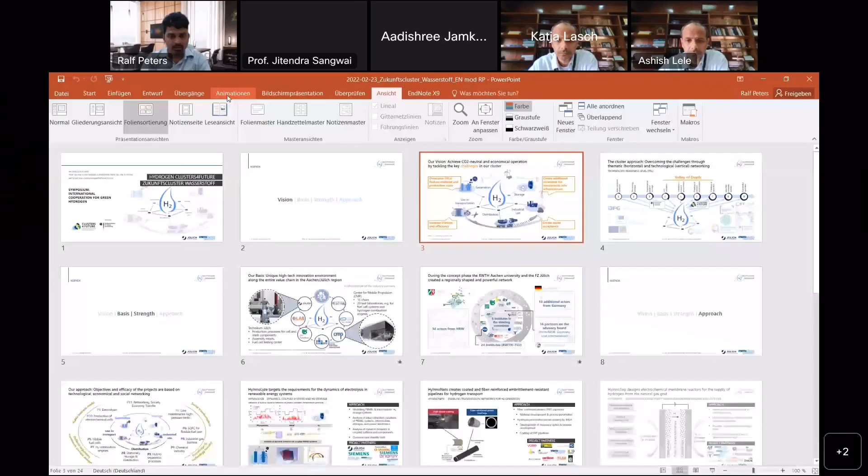So today I'm here in this panel discussion with another function I have. I am also in the steering committee of a joint cooperation between the University of Aachen and the Research Center Jülich - the hydrogen cluster. We gained this project in an initiative called Clusters for Future, where we look at several future technologies in Germany, from information science to biotechnology, and also hydrogen.

So what's this cluster about? I'll explain it very shortly and give you a brief overview of the project. What's the vision? We would like to have a CO2 neutral and economical operation, and we have to tackle key challenges in this cluster.

We have to overcome low TRLs, low technical readiness levels. We have to reduce material and production costs - that's from the technology of electrolysis, hydrogen production. We also have to do that in several countries, not only Germany, but also India. We have to increase the lifetime and efficiency, to generate and also for transportation. We have to create additional incentives to overcome the hurdles of high investment into infrastructure, and we have to create social acceptance.

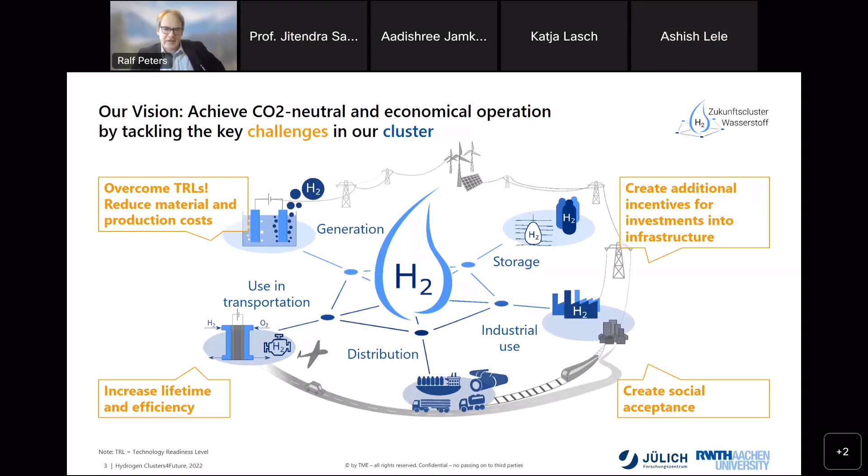One main thing is, if we look at these TRL levels I mentioned before - at 2 or 3, we are in basic research. And if we are at 8 and 9, we are really near market introduction, so we make a technical development. But we have here what we call a 'valley of death' at intermediate technical readiness levels, and with this cluster we would like to overcome this.

So what is the basis and what is the strength? We have several equipment in Aachen and also in Jülich. There's a Center for Mobile Propulsion with a lot of chairs at the university. They take care about fuel cell systems and also hydrogen combustion systems.

In Jülich we have a strong material side - Olivier Guillon explained that just before. We also have in our institute production processes for cell and stack components, assembly robots, and a fuel cell testing center.

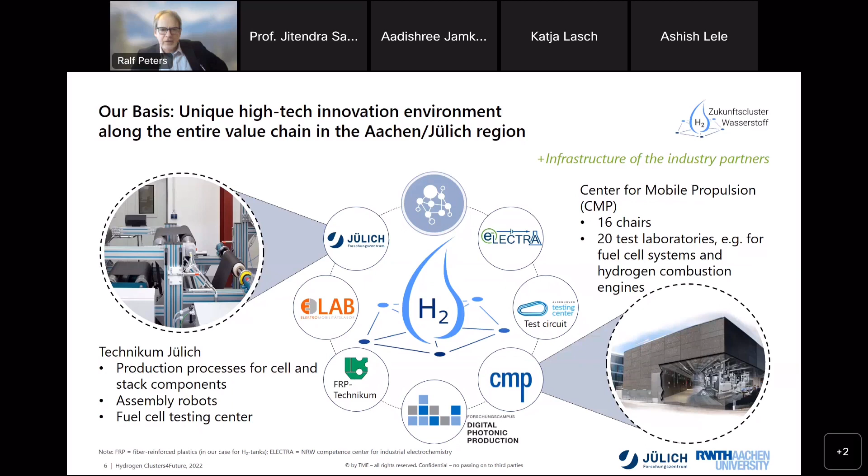Along these bubbles here, you see a lot of other things which are also implemented in Jülich and Aachen. So at the end, we have 6 institutes in the steering committee, but 24 institutes at the university and in the research center.

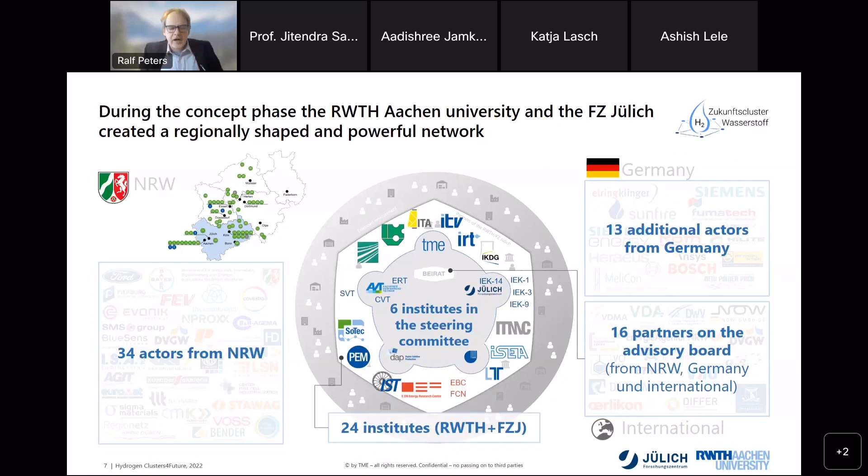We have several actors at a local state level, North Rhine-Westphalia, and additional actors also in Germany. So the main story of this cluster is that we start on a regional level and then expand to Germany, Europe, and then worldwide. This technology we develop here would be available afterwards all over the world, so that we can achieve a hydrogen economy.

So what is the approach? We have inside these fields I mentioned before several projects. P1, for example, is an electrolyzer. We also have production in electrochemical cells - working with electricity but producing something else, like hydrogen peroxide. We take care about use and transport, using hydrogen in fuel cells or in combustion engines.

For distribution, we have a project for hydrogen separation - using natural gas pipelines and extracting hydrogen afterward for the chemical industry, and also other applications like a high temperature fuel cell for flexible fuel use as a house heating system. In overall, we have this project up to P11.

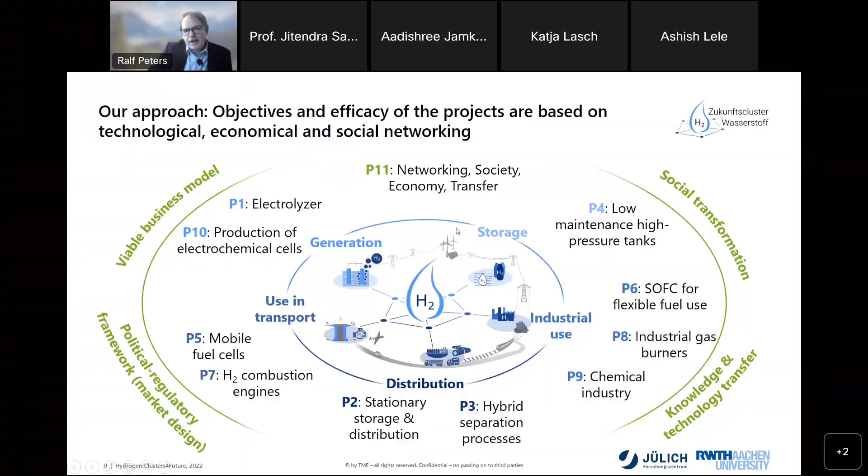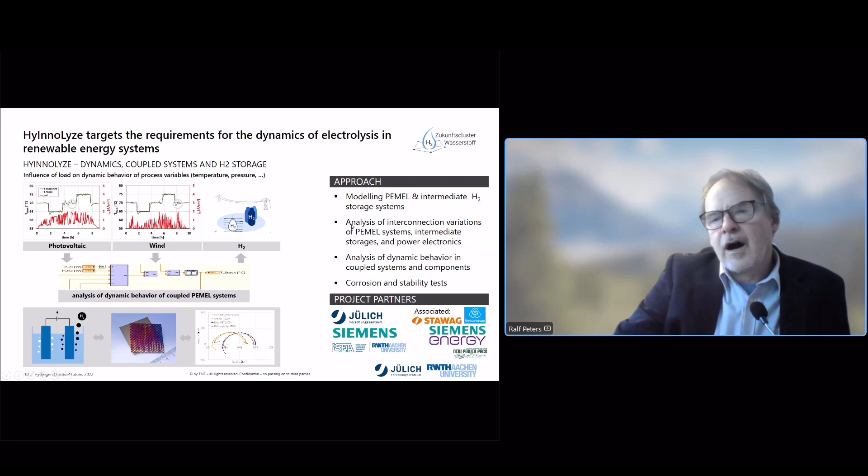For the electrolyzers, we are interested in stability, so corrosion stability tests, and a lot in control. So modeling the PEM and then finding a way to work with this PEM electrolyzer in a dynamic system.

To control that, for the HyInnoNets, each of these projects is called HyInno, and here the approach is to make fiber reinforced plastics for pipelines and also to work on hydrogen permeation barriers and coatings. That is also a technical issue to reach here new pipelines.

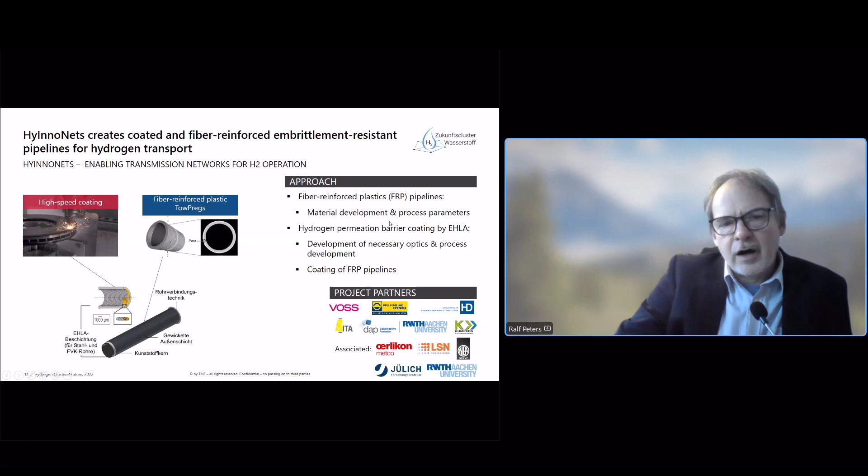What is also important are tanks, so we have to store the hydrogen. We can do that in liquid form, in gaseous form, and also in organic carriers. This part makes sense for smaller tanks, and these were developed within this project and further investigated. For example, what is very important is sensor testing to check the quality of the tank and if it's still working in the right way.

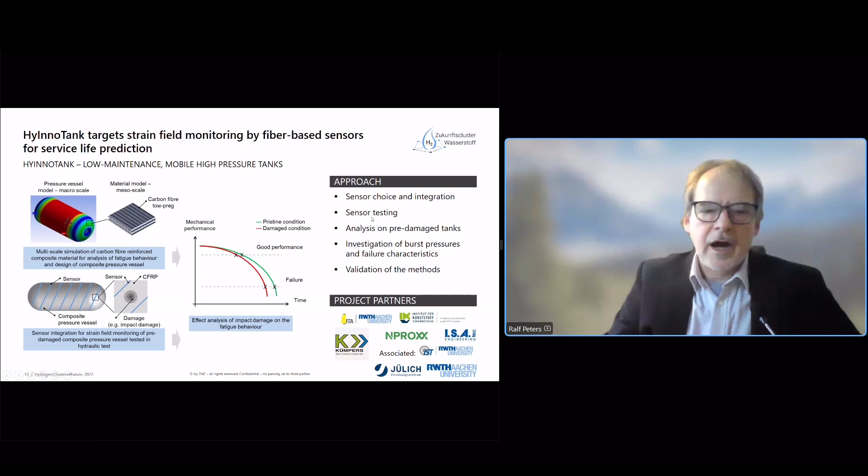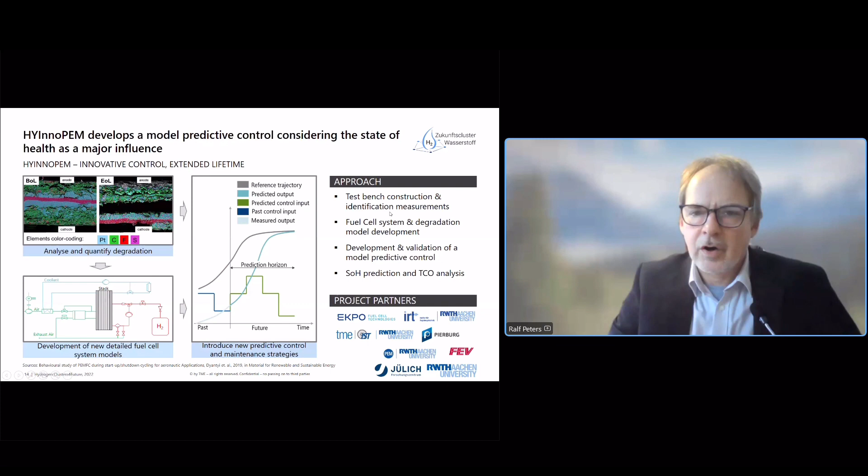For this project here, we looked for HyInnoPEM. We look also at control strategies and at measurement of fuel cells and degradation models.

We also have a project for combustion together with Ford, where a hydrogen engine is tested to look at this side of hydrogen usage.

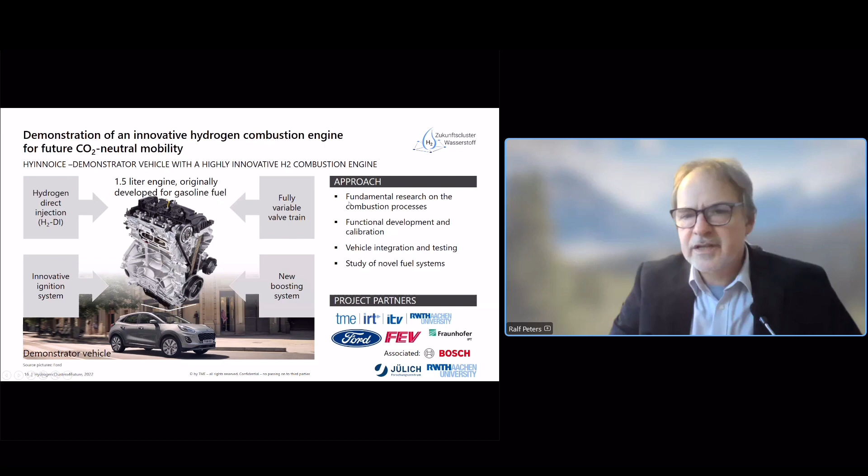For the HyInnoCells, here we work on additive layer manufacturing and also on electrochemical testing and on coatings. Here also the IEK-1, as mentioned before, is implemented from the material side because it's very important, if we have new materials, to invest in tight coatings, so that we have good electrochemical properties and also avoid corrosion effects.

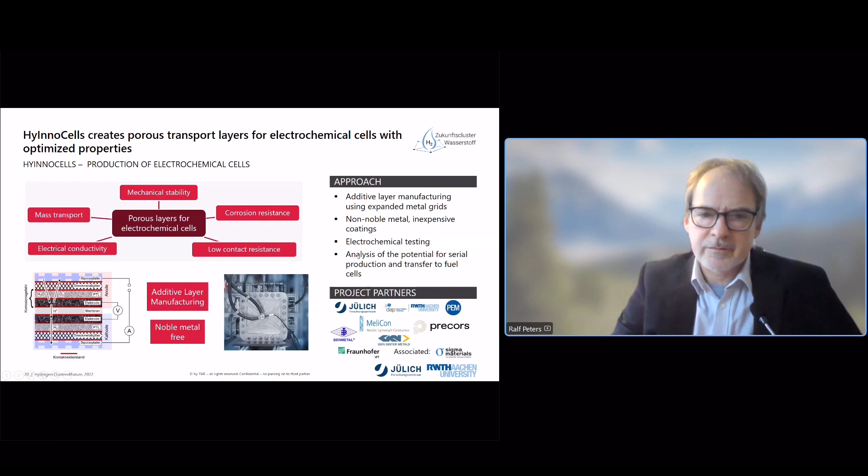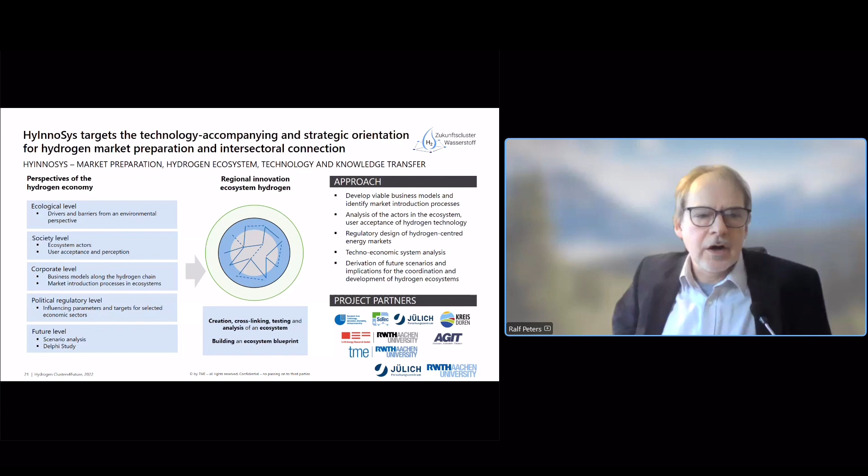And finally, on these levels, we look as an umbrella across all of these projects on the ecological, societal and corporate level, and on a future level. That is what I said before: we start on a very local level, then go to the local state, North Rhine-Westphalia, then to Germany, to Europe, and so on. We see this hydrogen cluster as a blueprint.

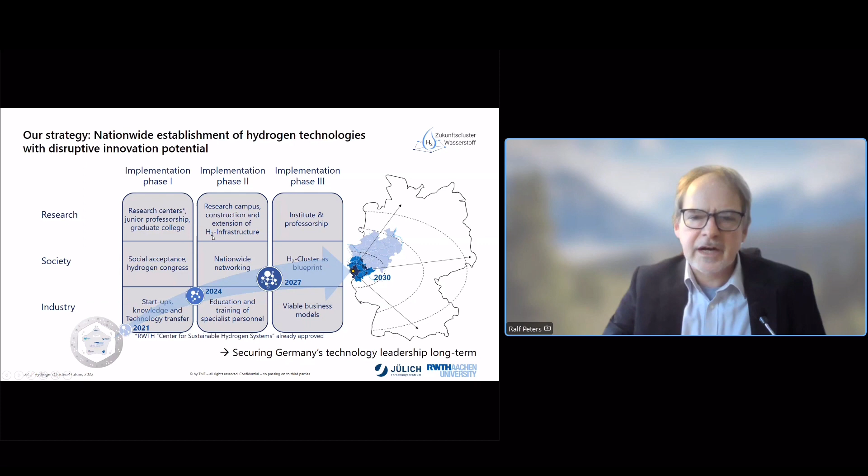So thank you for your attention, and that was just an impulse so that you understand what we are doing in this project. Thank you so much, Professor Peters.

Maybe we can go ahead with another speaker, Professor Lele, and then we can have questions together from the panelist and from the audience as well. So I invite Professor Lele.

Thank you, Jitendra. I will begin by sharing my slides. Give me a minute. I was not sure exactly what is supposed to be given in the first 5 minutes of presentation.

So what I've done is a little bit about what the CSIR program on hydrogen technology is, and maybe a quick overview on the storage and transportation choices one has insofar as hydrogen is concerned. For those attending from Germany, CSIR is a large collection of laboratories focused on research and technology development. We're not a university, we are a national laboratory.

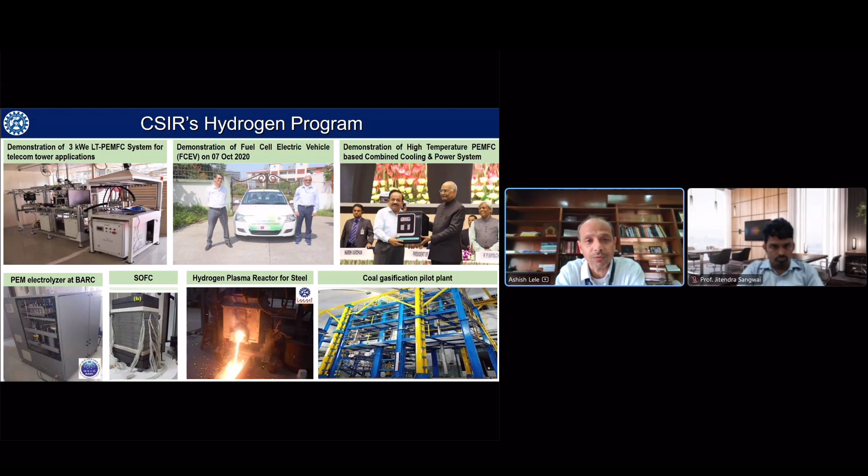Okay, so that was a little bit about the hydrogen program in CSIR.

Jitendra, is it required to give a short overview on hydrogen storage and transportation, or should we do this as a panel discussion? Yeah, you can give it right now, and then we can have a question and answer followed by that. Okay, so maybe a few slides on my take on storage and transportation.

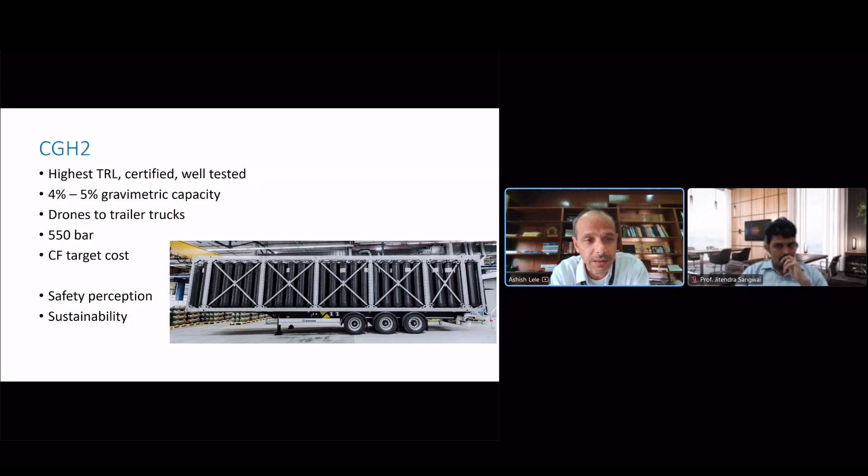But if you do a TCO analysis specifically in the Indian domain, we think that something like 550 bar would be the most optimal for us in India. There is, of course, a carbon fiber target cost.

Today, about $25 a kg has to come down to below $10 a kg in India. Something like $6.5–7 a kg is what is required to make this viable.

There is a safety perception, of course, for these cylinders because of the very high pressures. And the other concern which we in CSIR are today working on is the sustainability part of this, because although the life of these cylinders is about 20-25 years, at the end of life, we don't want landfills to be filled with used and end-of-life hydrogen cylinders. So we are looking at new technologies by which the hydrogen cylinders at their end of life can be recycled completely. This also has implications on the capex of these cylinders.

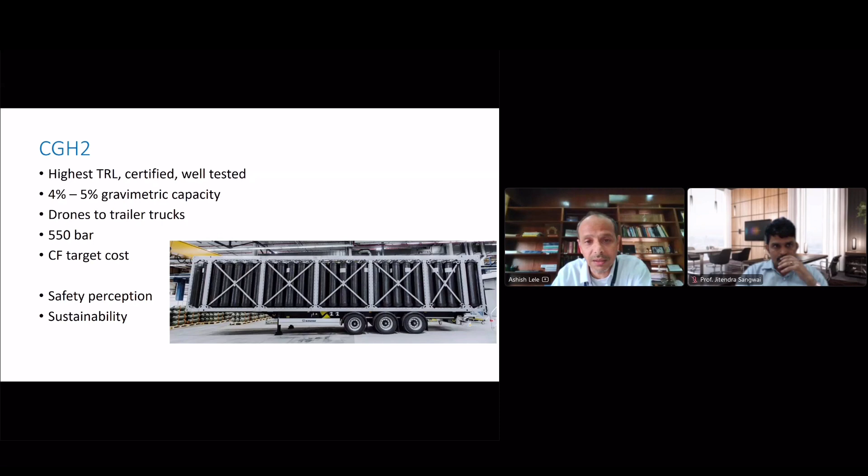The second is the liquid organic hydrogen carriers. The ones that are currently being pursued are materials like toluene and dibenzyl toluene. They're at reasonable TRL levels. There are companies around in the world who manufacture them and use them. Supply chains have been demonstrated across continents. They have reasonable gravimetric storage capacity.

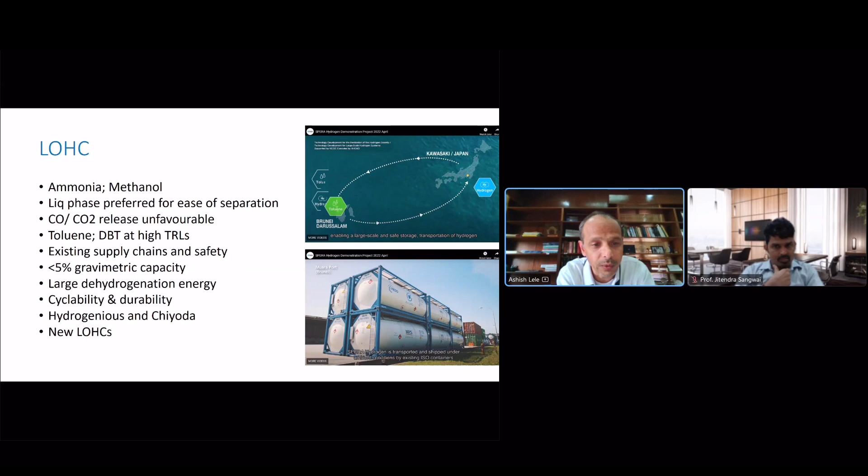However, their biggest problem today is the large dehydrogenation energy required, and that makes their viability a little bit of a concern. They also have a little concern on cyclability, especially those LOHCs that have other than carbon and hydrogen atoms in them. These heteroatom LOHCs have some issues with cyclability and durability.

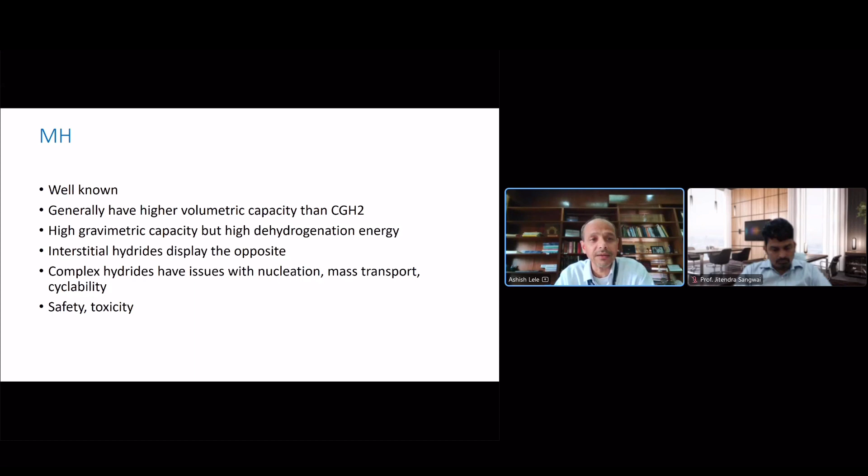The third is the solid parts, which is the metal hydrides. These do have both higher volumetric and gravimetric capacity, and so they're quite attractive. However, there are issues with them with regards to cyclability and creation of dendrites and so on. But also important is their safety, because these are very pyrophoric materials. So they also have the problem of large energy required for desorption of the hydrogen.

So the ones that are today most interesting are the high entropy alloys, or to some extent also a few MOFs. These are at the lowest TRL levels. There's a lot of science happening behind them. A lot of people are today using AI/ML tools to find out which might be the most optimum high entropy alloys. They're interesting because they have been demonstrated to be easy to couple with both electrolyzers and fuel cells. Their cyclability is right now a little bit of concern, and the gravimetric capacity is well below things like compressed hydrogen or the LOHCs.

There are other systems such as ammonia borane and so on, but I don't think I should spend much time on it right now.

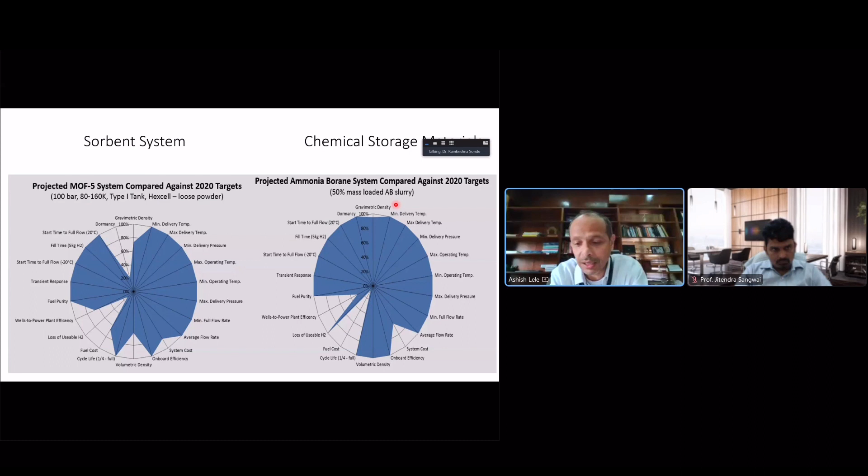Coming to transportation, we have, of course, the road or rail kind of transportation on land, shipping between continents. And of course, if you are transporting very large amounts over long distances, eventually pipelines become the most desirable thing. I think marine transportation is picking up in a big way. And in the recent COP27, many organizations have signed a paper committing to rapid and ambitious production of low carbon fuels for marine transportation. This is driven by the fact that the greenhouse gas emissions of these sectors are very significantly increasing today.

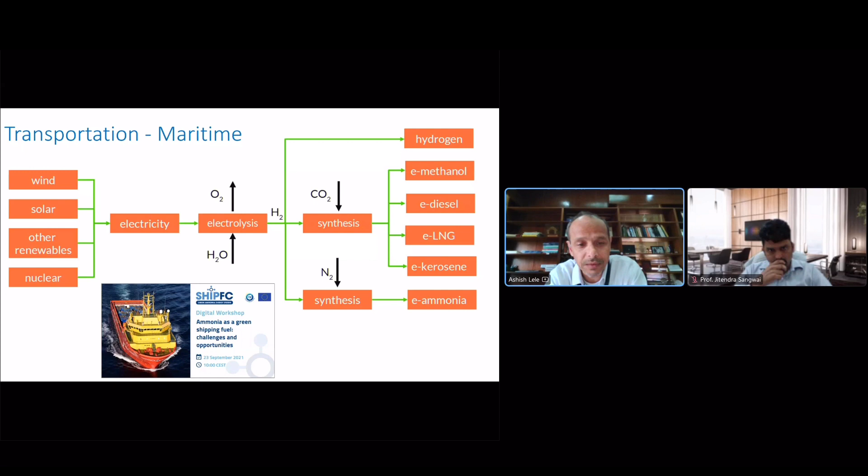So in marine, people are looking at various types of options, from ammonia to hydrogen and everything in between. I think the jury is not out yet as to which one would be the most optimal one. But I don't think it's ever going to be that way, because depending on what is available where locally, the choices for these various fuels will be made. What is clear is that the shipping industry will definitely move to various types of green fuels.

For long distance transportations on land, it is the pipelines which eventually should come up in a big way. Today, we have two types of solutions available: either there are tube trailers, which are mobile pipes as they call them, or there are flexible composite pipes which can be laid across the ground, and there are wonderful technologies available for this. However, these are meant right now for lower volume transportation, but over longer distances.

Of course, friends in this call from Europe will know much more about it than I do. The European Hydrogen Backbone project seems to be the most exciting one in terms of pipelines, with more than 10,000 kilometers of pipelines across the countries on the continent being planned. So it's probably the most ambitious one on pipeline transport. But in India, we are looking more at decentralized production of hydrogen.

India has declared about 10 states most amenable for hydrogen production. Mapping these against other factors shows decentralized production where offtake is required would be the most optimal way for transporting hydrogen. Leveraging local resources and supply chains helps reduce hurdles for storage and transportation. We aim to avoid more than 200 round-trip kilometers for transportation due to prohibitive storage and transportation costs, and sometimes transporting molecules is more viable than transporting electrons, which is counterintuitive, but it depends on the use case.

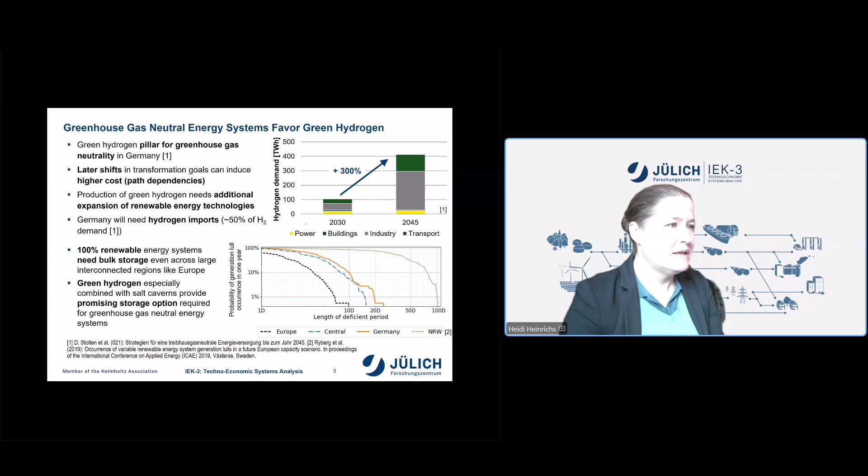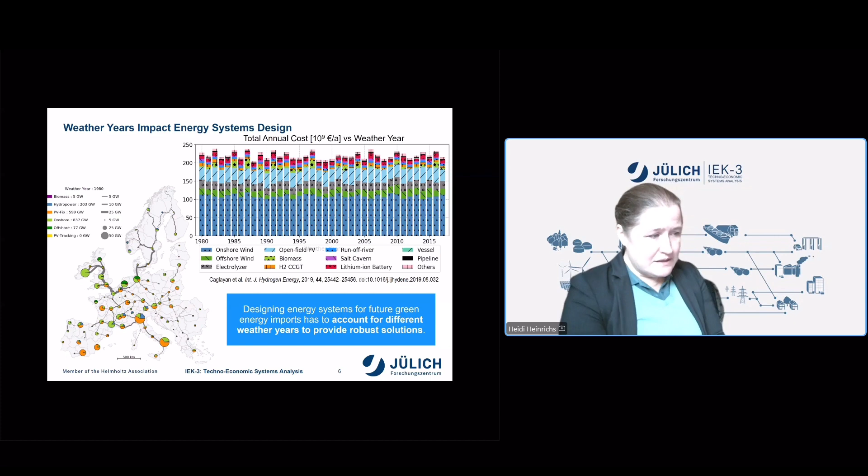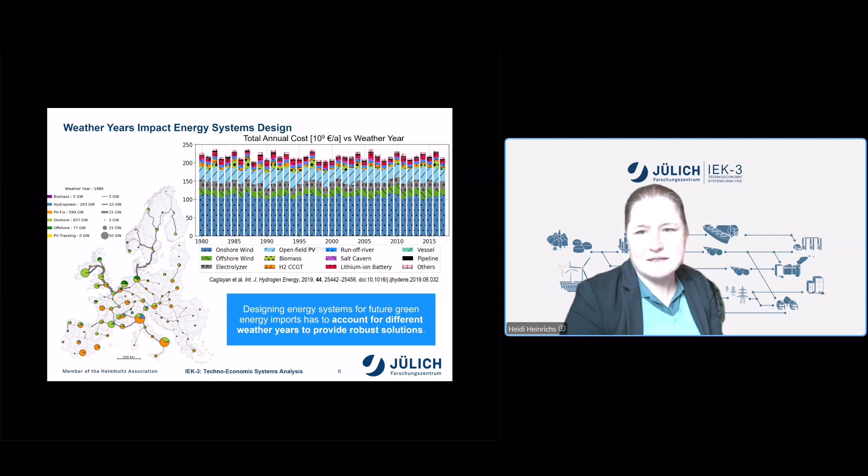Another aspect to consider when we scale or design energy systems is the impact of weather years. Normally scenarios are designed for one specific weather year, but we have investigated how system design can change if you consider different weather years. It's very sensitive - there are base trends, but especially for biomass, there are years with no biomass at all in the system we analyzed, while in others biomass plays a big role. So when designing strategies or scenarios for a country or region, you have to consider impacts of different weather years, and looking into the future, climate change should also be considered since weather patterns can change over time.

What we also consider when we analyze scenarios is the potential synergies and competition for land and energy resources in the areas we look at. For this, we normally do a full land eligibility analysis where we look at where we can place renewables and where not. We are always interested in local perspectives, because we can do this on a global scale, and we've done similar analysis for India as well, but that's mostly default values on a global scale. Having local perspectives - the preferences of the people living there - is much more valuable to refine those approaches.

Based on that, we typically do simulations of wind turbines and photovoltaic modules combined with weather data. Then we design a hydrogen infrastructure - for example, in this case, Patagonia in South America - where we can connect wind parks together to electrolysis, and then connect the electrolysis with hydrogen pipelines to a potential exporting harbor. At the exporting harbor, we can then derive export cost independent of the capacity expansion we assume.

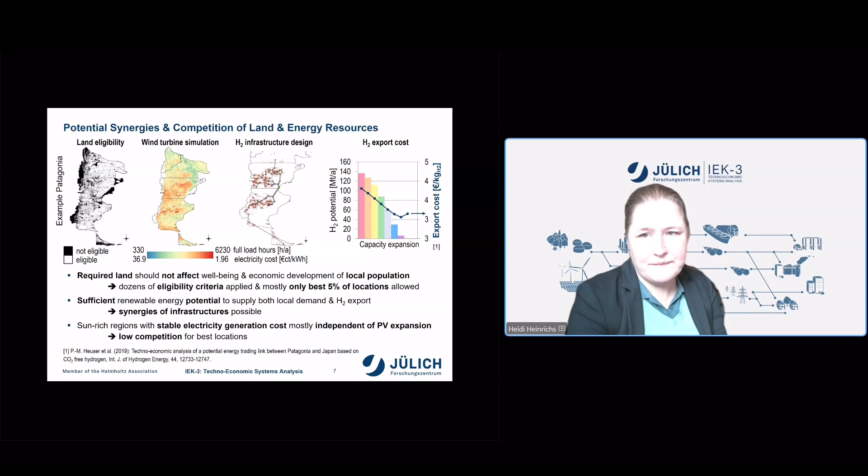Another thing is, especially for PV-rich or sun-rich regions, if you look at the expansion rate of photovoltaics there, the cost is quite stable, because the deviations in solar radiation in sun-rich regions are limited, meaning there's only low competition for the best locations. That's different with wind energy, because the deviations are much higher and there could be competition - whether we use the renewables for hydrogen or for electricity, etc. - so there should be a balance. But this competition is only low for photovoltaics.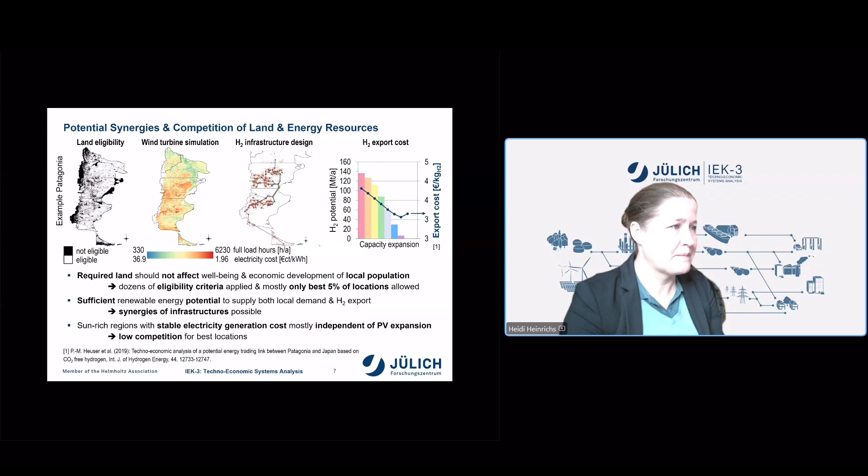Another thing that has to be considered when we talk about electrolysis is the water demand, for sure, especially in sun-rich regions, but not only those - for example, Germany also has an issue with water stress, even if it's now quite wet outside.

For regions which already have water scarcity even without climate change, seawater desalination could be an option, because when you compare the cost for seawater desalination, it's very low compared to the expected levelized cost of hydrogen. But we have to be careful in that regard, because it really depends on how you design the seawater desalination plant, whether it's sustainable or not.

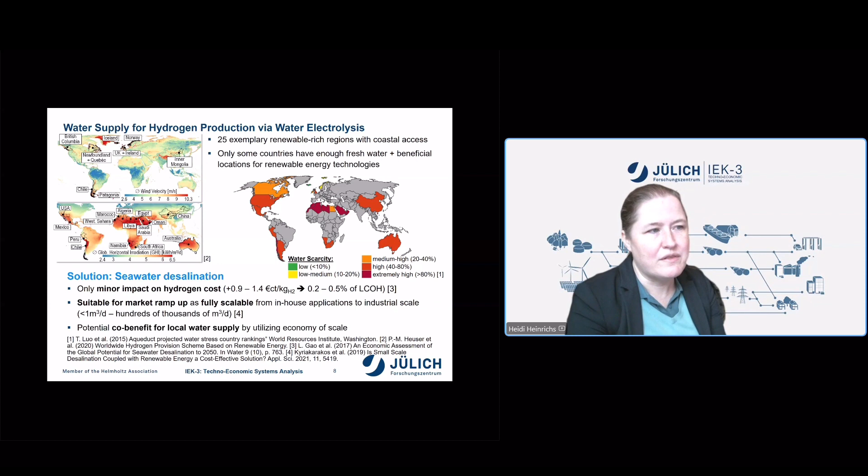It depends on whether it would impact marine life or not. That's especially dependent on how you design the outlet, because a lot of water goes through the seawater desalination process, and a brine comes out - how that is brought back to the sea and how it dilutes. It has to be ensured that it does not impact local marine life there.

That's possible, but we will need regulations for it, because it's a bit more expensive to do this in a sustainable way than just doing it. So I fear if we do not regulate this, we will see a lot of impact on sea life. But on the other side, if we just aim for local water, we might have even bigger issues in terms of not having enough water for the population, for drinking needs or agriculture, etc.

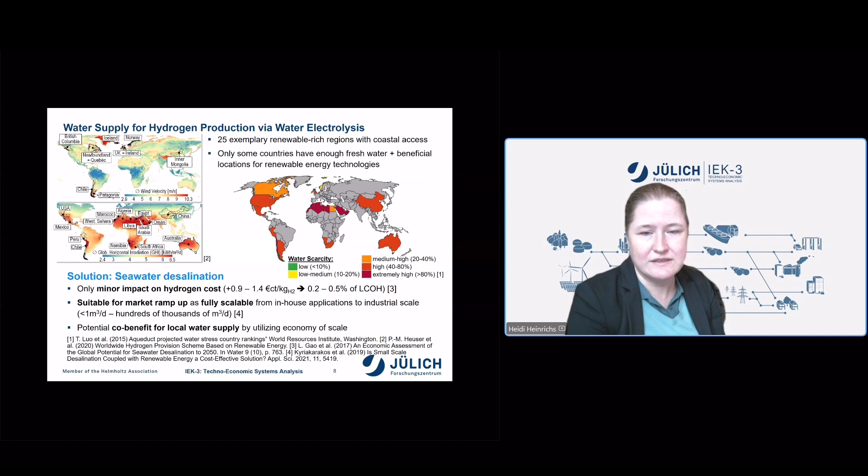So another example, or what I've brought to you today, is something we have done for West Africa, where we have created a green hydrogen atlas. There's also, you see in the link below, an online GUI where you can explore the results we have published so far.

And there again, we started with looking at where we can place renewables in exchange with our local partners. Then simulate, in this example, the wind generation and derive from that local green hydrogen potentials, and then combine that with sustainable groundwater availability there.

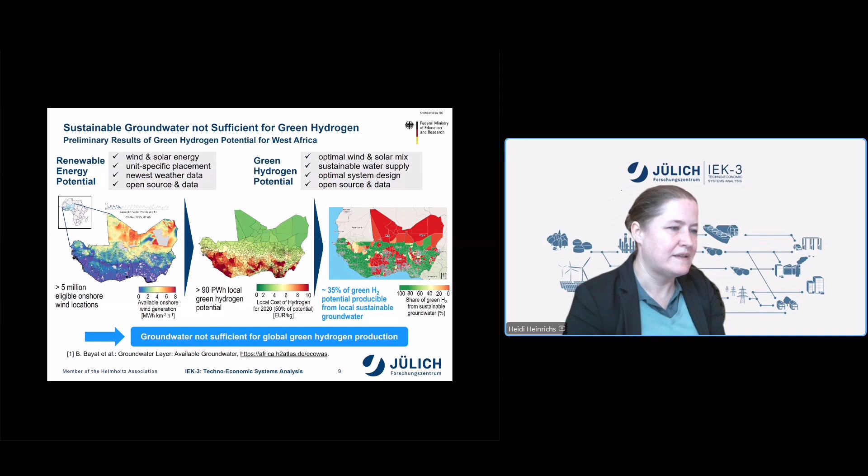And you can see here in the blue text that roughly only 35% of the technical potential remains if we limit it only to sustainable groundwater. Hence, the role of seawater desalination became even more obvious.

What you see here, what we did for West Africa, we could potentially do for India as well. So if any one of you might be interested in something like that, please contact me. Maybe we can explore some options how to do something like that together, especially to exchange about what the preferences of India are in those regards.

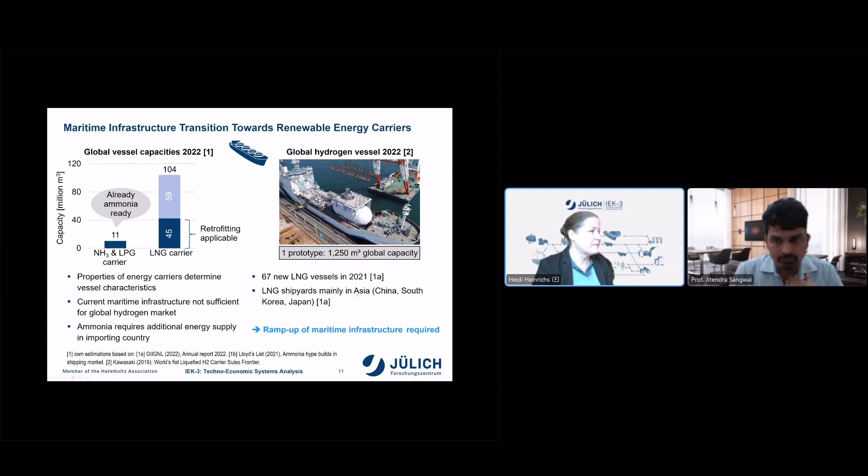And Kawasaki have already started to gain experience with a hydrogen vessel, and we hope that they will proceed there as well. Here, maybe I can just go shortly over it. You will get it in the slides afterwards, I guess.

When you consider hydrogen on a global scale, there's a lot of countries who could enter the markets, and that can lead to relatively stable costs when it comes to imports. So it could be different compared to, let's say, the fossil markets by now. And I think that's a big chance for the world.

Maybe to sum up, the key takeaway messages: when we aim for climate neutrality, then green hydrogen is a clear pillar for that pathway. We should be aware of creating, or being aware of, synergies and competitions when it comes to resources, especially in land and energy.

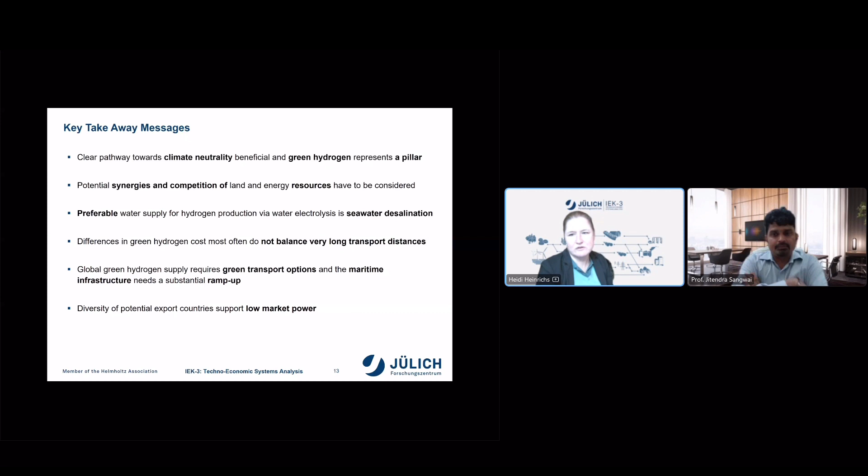We should have seawater desalination included in the strategies, but please be aware that it's designed in a sustainable way. When it comes to transport, distances are in a way limited. In our case, it was 12,000 kilometers at the maximum, and a green transport option on a global scale would be required. We hope that when we have a lot of different export countries, there will be a really free market, so that their market power is not concentrated only on a few countries.